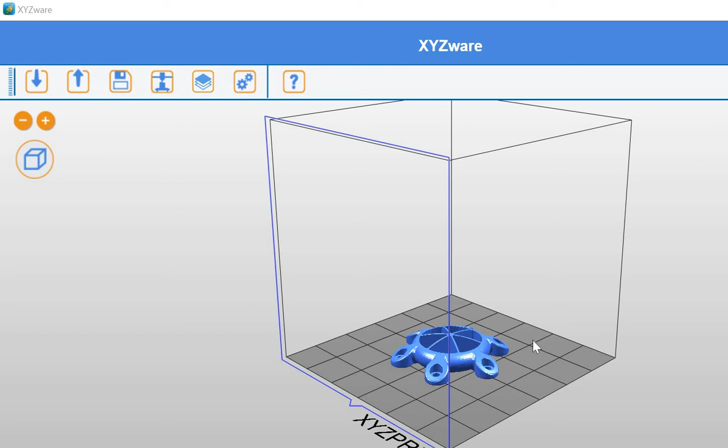Okay, here's my part that I have imported. Where is my mouse? As you can see, it's a beautiful part. I have no idea what its function is. Anyway, let's move forward. Okay, so first thing I'm going to do is, everything's scaled.

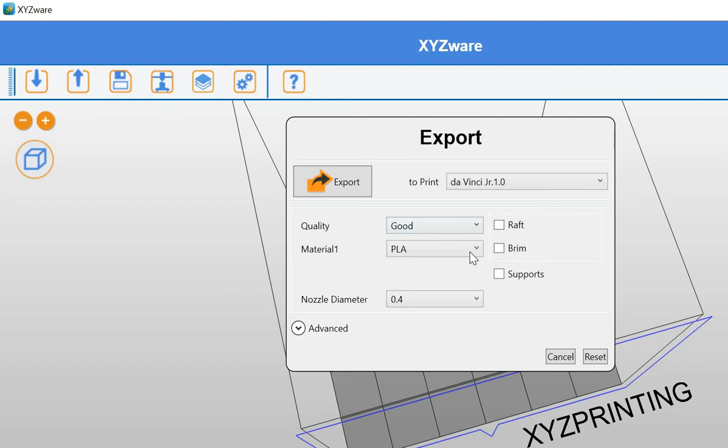It's landed where I want the position to be, so I'm going to hit Export. DaVinci Junior 1.0, good quality, PLA, nozzle diameter set to default. Everything here I'm going to keep default, except I'm going to lower the temperature by 3 degrees.

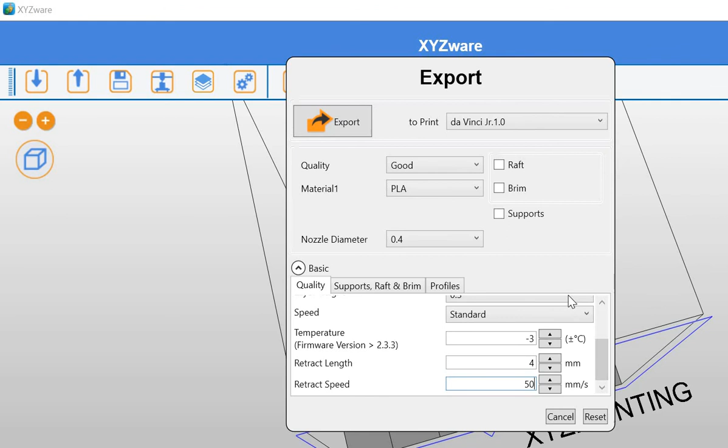I'm going to change the retract speed to 50, and I'm going to keep the retract length there, and I'm going to keep the speed at standard, which I don't know what that means in millimeters per second. Layer height is that. So everything looks good to me, it's just the way I want it. So I hit export.

And let's do it here. Let's just call this XYZ test.

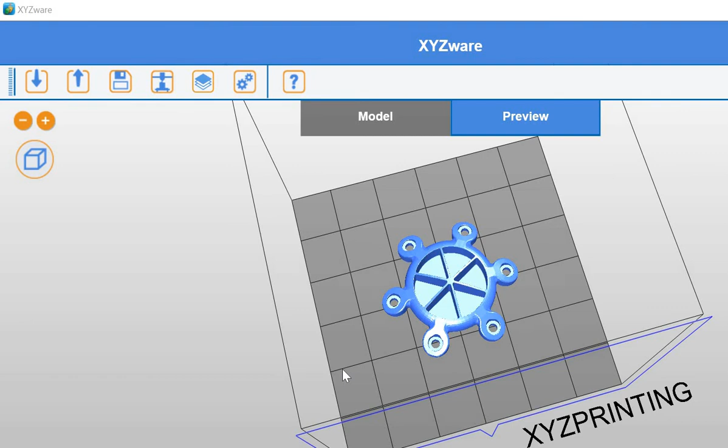Slicing. Okay, so I'm going to keep this screen up. Hopefully I'm going to move it up just a little bit so you can see down here where it says retract speed. It is at 50 millimeters per second. Retract length is at 4. Temperature has been adjusted. Everything on here looks great.

Okay, so now I'm going to close that window for the moment. I will reopen it. Okay, I'm going to minimize that. Go into 3D printing files, 3Dubs. Okay, this is the program where I can open up that file.

Okay, hit open, and I'm going to put it right here. Name it XYZ test. Hit save. Okay.

Close that out. Open. I don't have Notepad++, so this will work. Hey, don't eat my cord. Okay, WordPad will work.

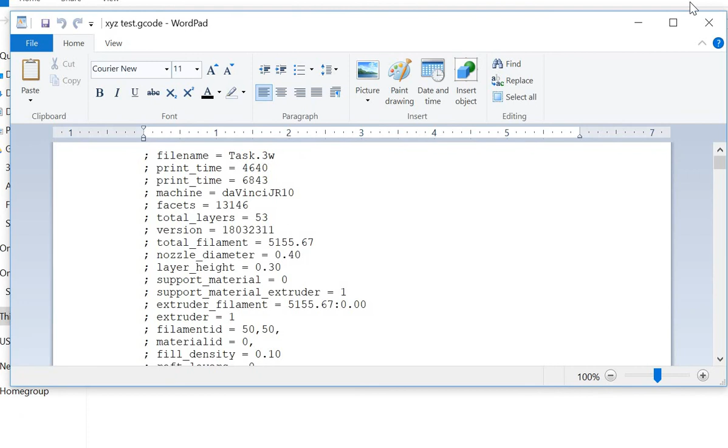As you can see, everything, file name, it just says task.3w. That's fine. Print time, it's all accurate. The amount of material being used, 5.1 meters, is accurate.

Let's go back to this. If I click info, it should be 5.156 meters, correct. And if I go back to WordPad, 5.156, that's correct, that's correct.

Everything here is correct until, for some reason, okay, speed is 35 millimeters per second. I'm assuming that's what standard is. I don't know. But if we scroll down, okay, retract length is at 4, retract speed is at 25.

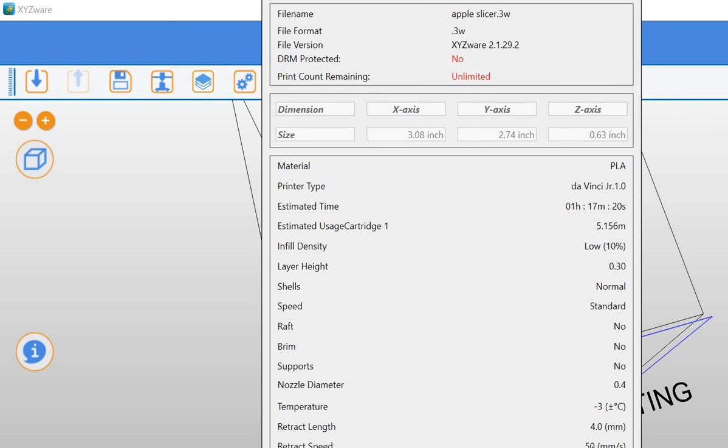However, right here it says retract speed is at 50 millimeters per second. So between... and this is on a brand new computer, I've tested it on 3 different machines and I get the same output.

Perimeter speed is 15, but notice, where did 25 go? It's half the value of what I set. So I don't know if there's some sort of multiplier in the G-code that tells it to multiply this 25 by 2 to get 50.

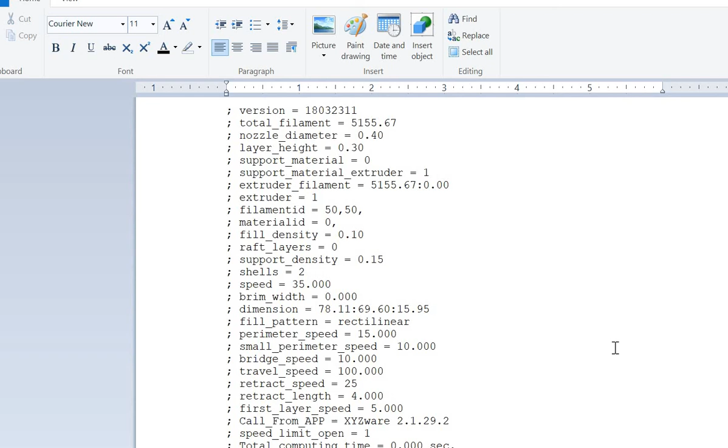But anyway, as you can see, there's no temperature setting in here to tell it to go down 3 degrees, unless this is it right here, S-3. I didn't look at that last time. That could be it. But my biggest concern is this right here, how it's 25 rather than 50.

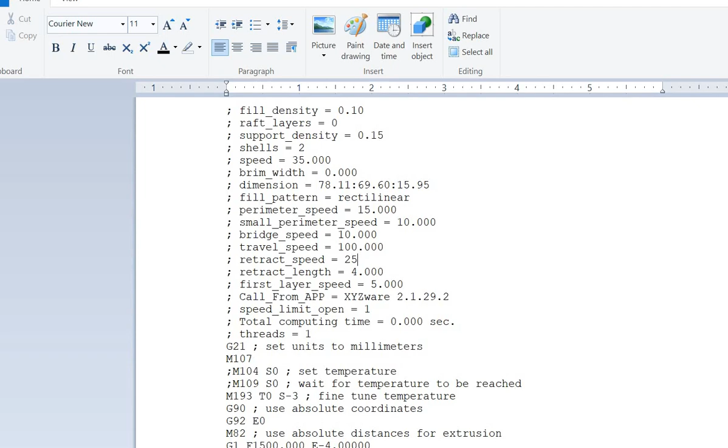And when I've changed the retract length, this doesn't change either. In fact, you know what, I don't want to quote that, but let's try it out. So I'm not going to update yet because this is the newest version that just came out today.

Oh, snap. So let's redo this. Let's find an STL. Sure, the wheel.

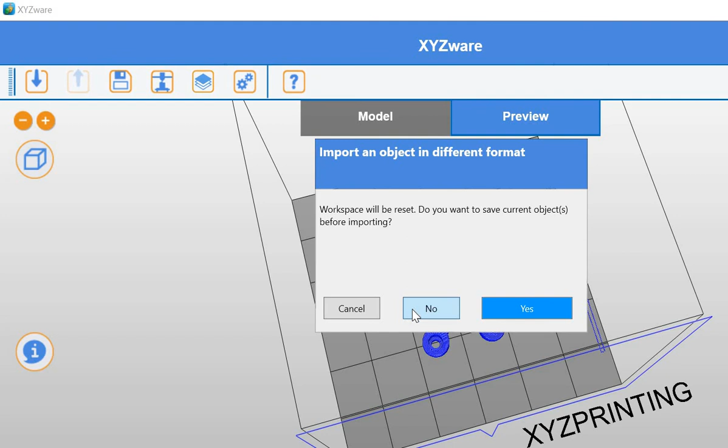Hit yes. No, sorry. Wheel. Open. No. Yes, I want to resize. Where is the mouse? So I can rotate.

Okay, I'm going to scale this down by about 50% here. And we're going to redo everything. I'm going to change other settings too so that you guys can see.

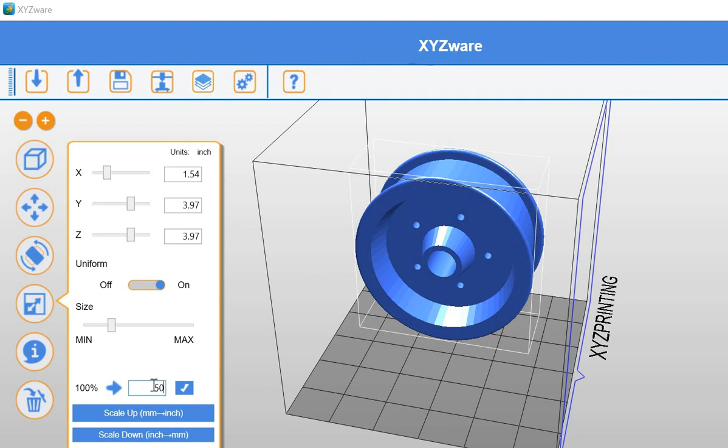Nope, I want to do it another 50. I want to do half that again. There we go. I want to land. And I want to... is it along the X that I want to change that? Dang it.

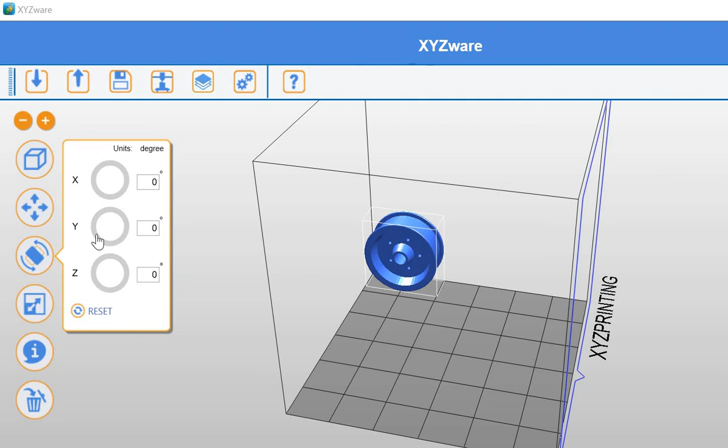What? Hey, don't eat my rice. Gus. Sorry, we have baby bunnies. They're running everywhere.

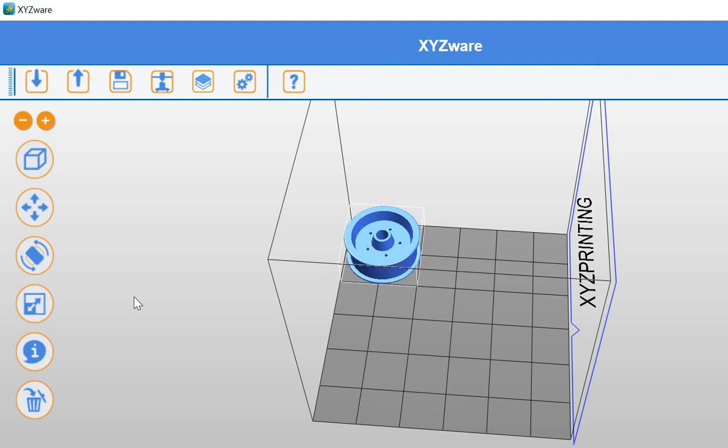For all intents and purposes, I don't really care that it's in the corner. So let's export. Good quality PLA, nozzle diameter set to that. Going to change this to -5 just to see if that value changes, and I'm going to change this to 3.7. I'll leave retract speed at 30, not even going to change that. So everything looks good to me.

Let's put this in the 3W folder, call it XYZ wheel, save.

Okay, retract speed's at 30, retract length's 3.7, -5. Everything on here looks great, 3.915 meters. So in the G-code it should say 3,915 millimeters. Let's go find out.

I'm going to close that real quick. Open up this 3dubber.exe, and I can supply this if you guys need it, just let me know. And decrypt in, here we go, XYZ wheel. I'm going to hit save.

Okay, so it is now saved. Let's go ahead and open up this G-code and compare it.

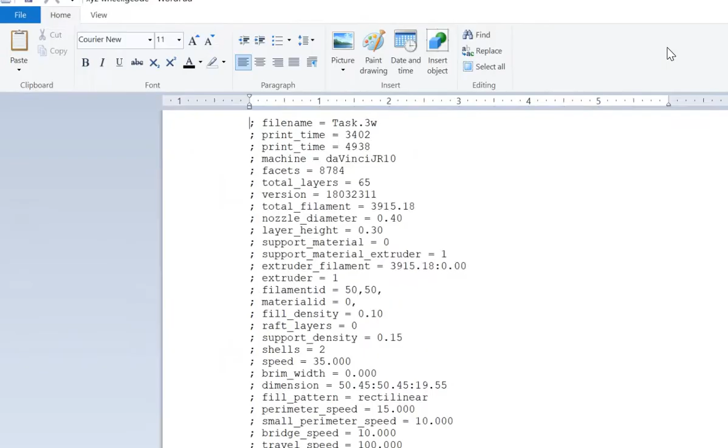So yep, 3.9 meters of length. The time, if you divide this by 60, will give you roughly the minutes. Let's see, layer height, nozzle diameter, all that is good. Let's scroll down.

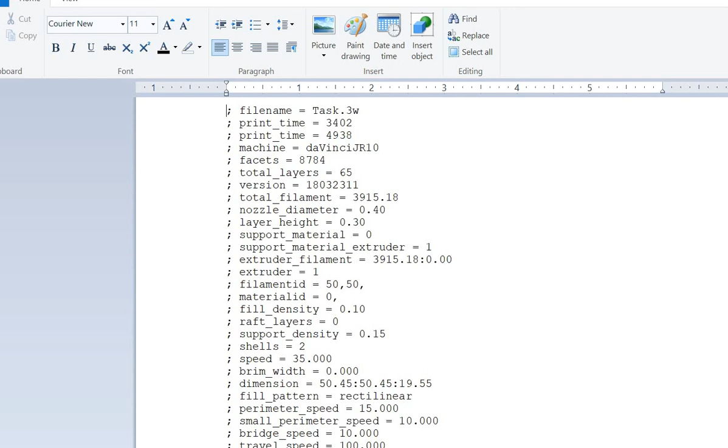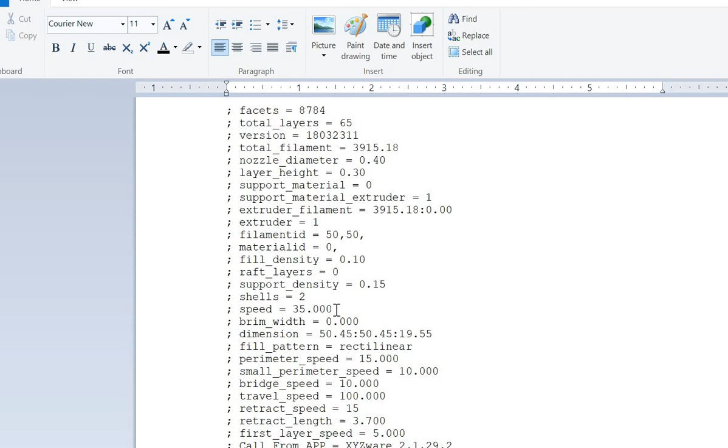Okay, retract length did change, good. Retract speed, notice now it's 15 instead of 30, so it's half the amount. Let's go to info, retract speed is 30. So the speeds are somehow, and this one's 35, so I guess that's standard. I don't know, maybe it's really 70 because it seems like every speed is getting cut in half.

Now let's check temperature. There it is, yes, S-5. So there's the temperature thing, that's fine. But mostly what I'm concerned about is this right here, and this one, it seems like the speeds are only half.

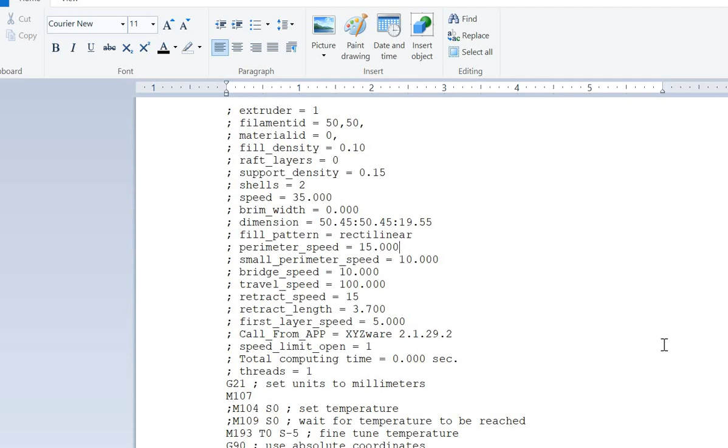Anyway, I don't know why it's not keeping the speeds at 30 or 50. And also, I want to show you one more. This is a long video, I apologize.

Let's try this again. You can do it. Okay, XYZ does not like my screen capturing utility at the same time. So, yes, I'll log in a moment.

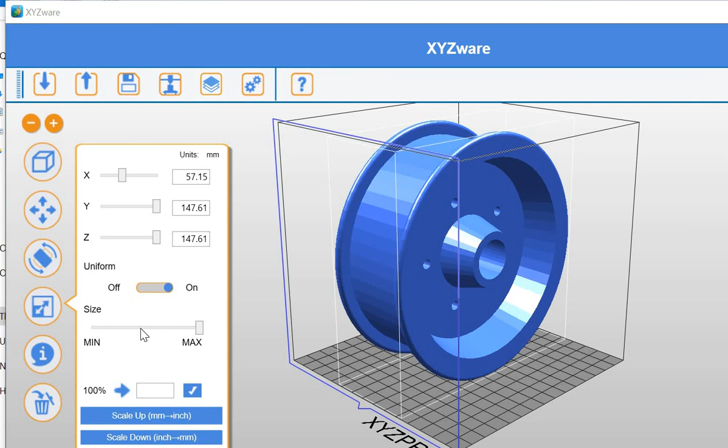Okay, I'm going to scale this down. That looks phenomenal. 270, make it flat.

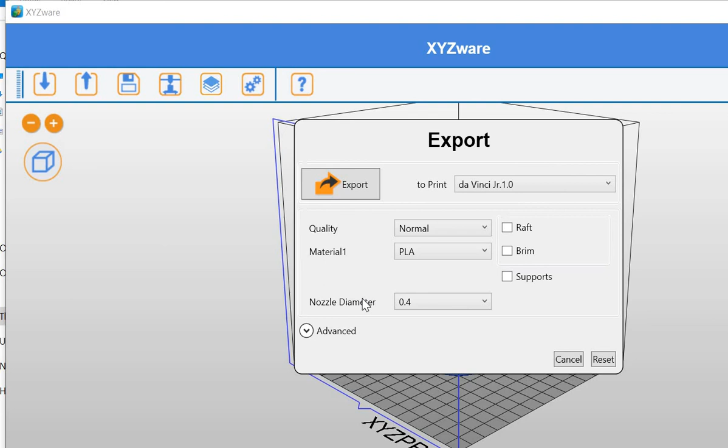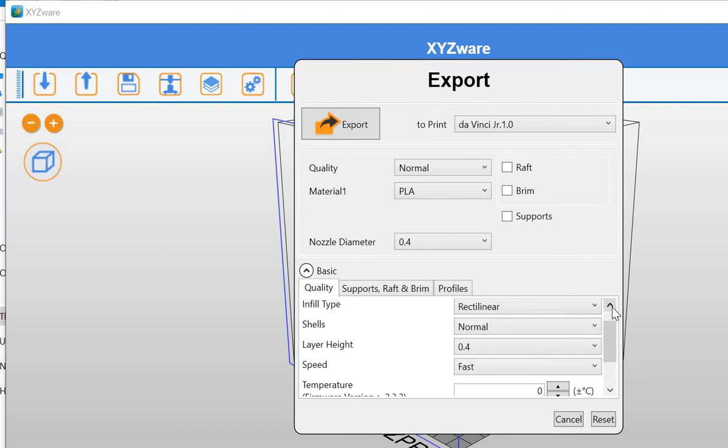Okay, we're good. Now I'm going to export, except this time I'm going to go to normal, which should set it to fast, which according to release notes in a PDF I have, fast is 100 millimeters per second. So change this to 32 just for the heck of it. Okay, alright, export.

Just call it wheel because there's nothing else there. Okay, retract speed's 32, retract length is 4, nothing on the temperature, so 4 millimeters roughly.

Okay, let's go here, let's open up the file, decrypt it. It really shouldn't be called decrypting, it's just literally opening it. We'll hit save and I'll close that. Here's the G-code.

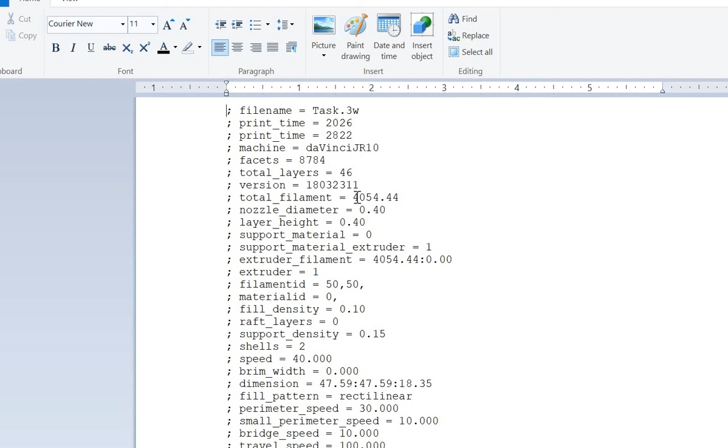Okay, I'm going to maximize that. So this is correct, this is correct. Let's scroll down. Okay, now the speed has gone from 35 millimeters per second to 40.

Now on fast, I was told it was supposed to be 100, and I will try to find that for you guys. Now retract speed is 16 instead of 32, so it's exactly half. So that's interesting. Now the temperature, S should be 0.

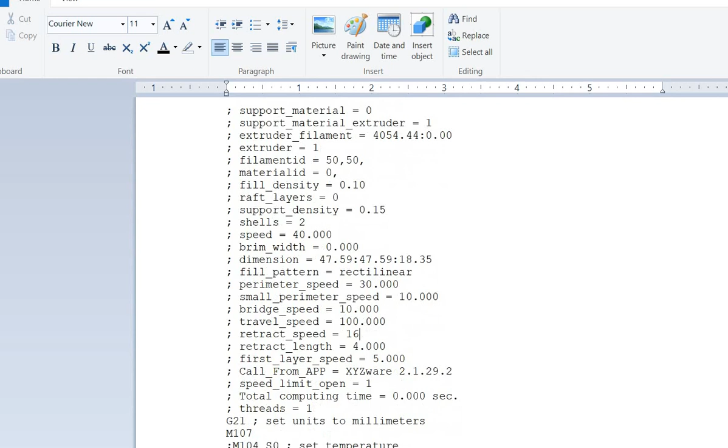Yes, there it is, for fine, actually there's nothing for fine-tuned temperature. That is not even in the G-code anymore because we didn't even touch the temperature. So it's just, for some reason, those speeds are getting cut in half.

Do I have documentation for XYZ? Let's find out. I'm not seeing it, it's on my other computer. But in the one, it's a PDF that talks about making a little fan shroud. It says the fast speed is 100 millimeters per second, not megabytes, I don't know why I say that. Millimeters per second. Anyways, so that is the issue that I am finding.

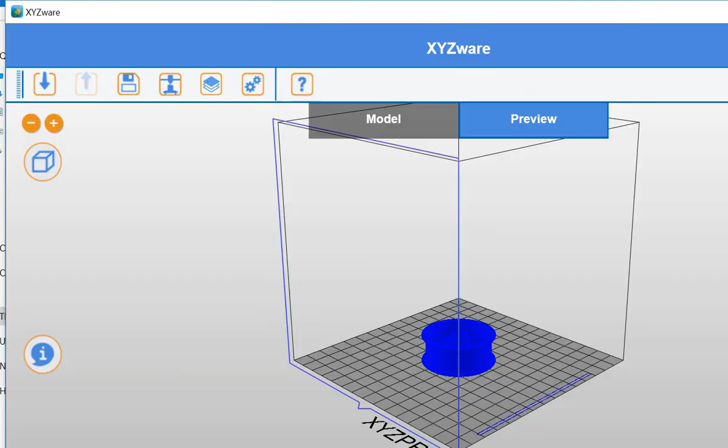Now the only reason why I discovered that is because I actually wanted to see what G-code looked like. And when I saw this, I was like, oh, I wonder if this is in the G-code. Then I happened to see this, and then that's when I was curious.